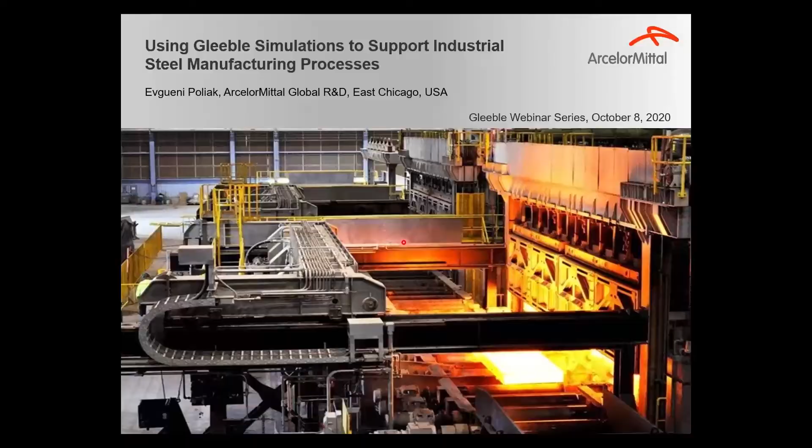So our objective here - our R&D Center supports basically this type of activities. We develop new products, we develop new steel manufacturing processes, we improve and tune existing processes because the world doesn't stay the same all the time, so we need to tune the process for the new product.

We transfer products between various ArcelorMittal facilities within the United States and all over the world. Of course, because it's manufacturing, there are always some manufacturability issues that arise, and part of our responsibility is to help the mills resolve these things. And also we are involved in application of our steel products at customer sites.

Because of that variety of our tasks, we have a very wide variety of equipment here. And our Gleeble lab is just a part of the research tools that we have here in the U.S. Research Center. The main objective for us is to provide very quick response to the requests from the production facilities.

That includes new product manufacture, new product development, because the faster you develop the product, the faster you commercialize it, the faster you get the payback.

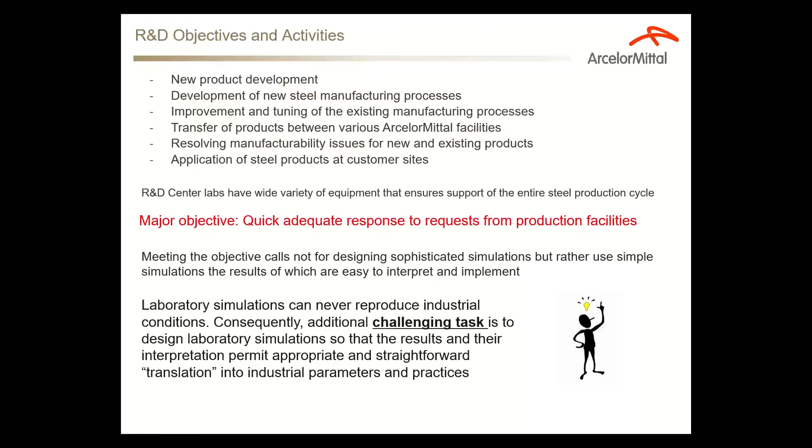Our Gleeble lab is part of our research tool park. We have a 3,500 machine with a torsion MCU, and quite recently we upgraded the control system to GTC, which gave us a lot of new capabilities.

What we use this machine for is deformation resistance analysis of flow curves, constitutive analysis, strain hardening behavior, you name it. We use these results to help mills set up their rolling practices.

That includes recrystallization studies and strain-induced transformations, high temperature torsion tests for plate applications, and hot ductility tests for casting applications. We also use pyrometry, pyrometer calibration, and simulations of surface oxidation extensively. We support some welding operations in the mill, since we also have welding simulators which are much more powerful, so we combine the Gleeble with those simulations, and we're also involved in the recent problem of liquid metal embrittlement.

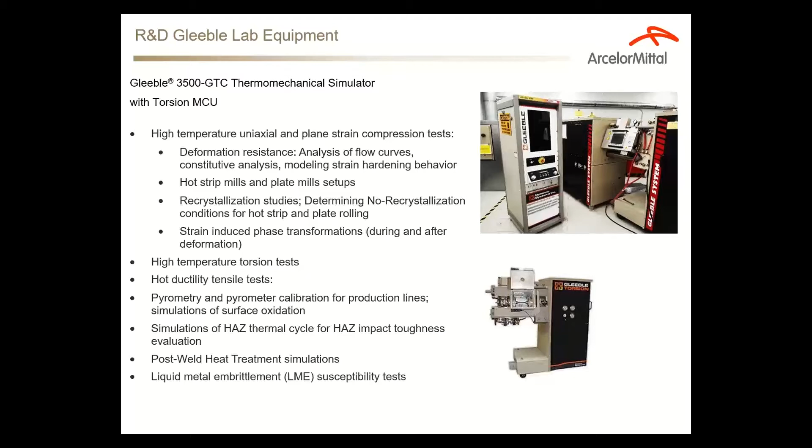Let's start with how we support casting simulation. When we cast slabs, they're not always perfect. The liquid steel is cooled, and through over-cooling, handling, and transporting the slabs, slabs can crack. Here you can see an illustration of how they can be cracked.

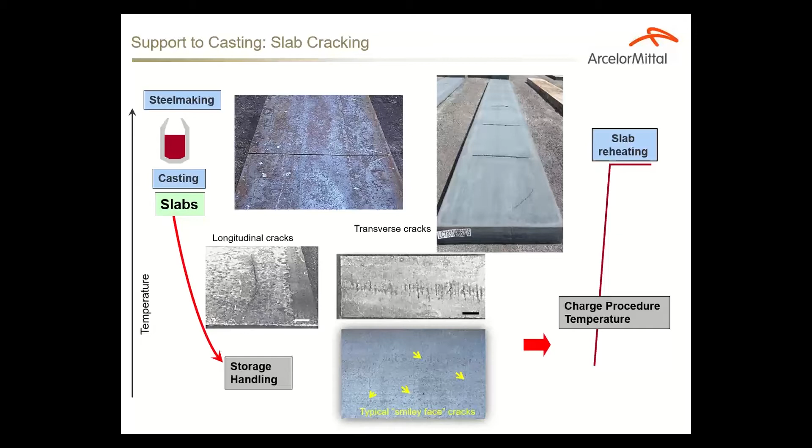Then these slabs are basically not usable for further processing. So one of our tasks is to find out why the slabs crack. To do this, we perform hot ductility measurements, which involve heating tensile specimens to a very high temperature, soaking, and pulling at different temperatures in tension.

This scheme shows how we machine the samples, and on top you can see the geometry of the sample. We use round cylindrical specimens with a depressed cross section in the center, because Gleeble mainly uses direct resistance heating, so we have to make sure the specimen fractures at the point where a thermocouple is welded.

Although this is not a very comprehensive tension test, we see it as an advantage, because when slabs crack, that means there are already some defects, stress concentrators present in the slab. So we're focusing on the localized deformation, which gives us an idea of why the slabs actually crack, not why the crack is initiated.

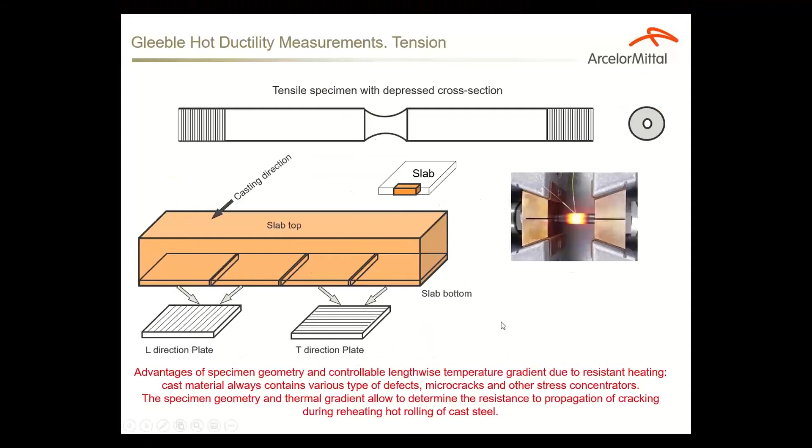Typically, all steels exhibit what we call a ductility trough in a certain temperature area. There are several types of ductility troughs when the slabs are cooled, and those regions of very low ductility of cast steels are related to different metallurgical phenomena, like precipitation and different kinds of non-metallic inclusions.

With our ductility measurements, we can detect some of these ductility troughs using the reduction of area criterion. We can also measure the stress at fracture and its temperature dependence. Interestingly, over the years we've tested about 200 compositions from various slab sources, and we've built a database that allows us to do this kind of regression.

So when a steel making plant asks us for ductility data, we can do both things: test the samples directly, and derive the ductility from regression equations built on our multiple prior tests.

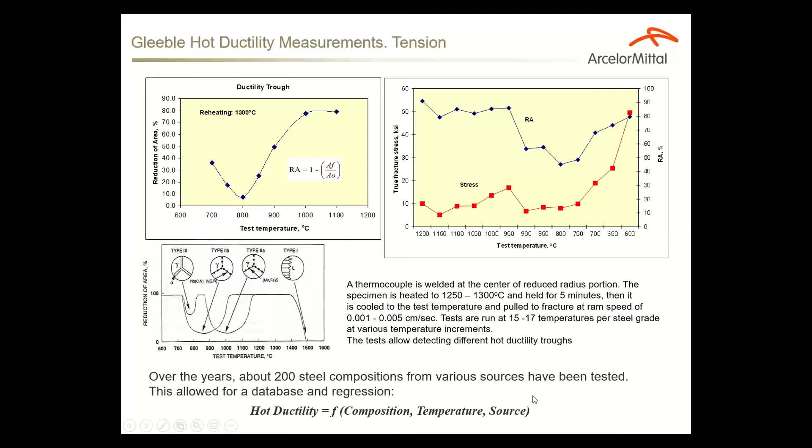Another aspect of our application to casting is that typically, if the caster is curved, the liquid steel goes down and is bent and unbent as it crystallizes. This kind of deformation can also induce fracture of the slabs, cracking, and other very unpleasant things.

So part of our task was to determine the safe curvature radius that a particular steel grade can sustain during crystallization. This is just an example for one of our steels. Of course, the susceptibility to fracture during crystallization depends on caster configuration, casting speed, and chemistry.

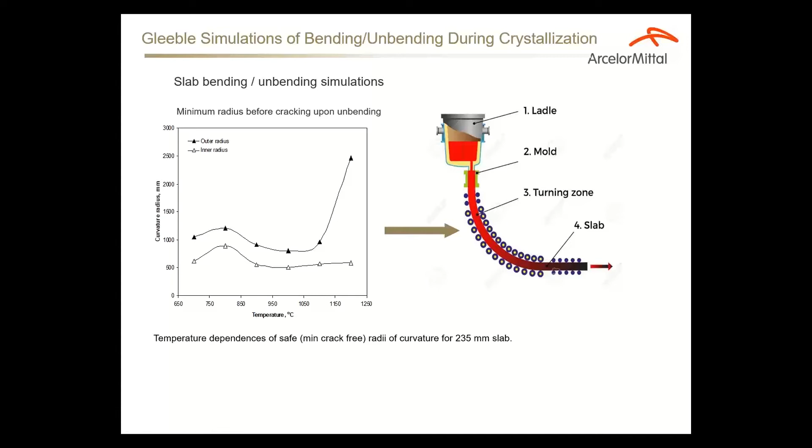So when we provide this kind of data to the mills for a given chemistry, it helps them adjust the casting speed and temperature distribution in the mold, and they find that very useful information because it can help prevent slab cracking.

The Gleeble machine, with its high flexibility and temperature control, allows us to simulate this kind of thermal cycling on the surface, and then we perform ductility tests. We show that this thermal fatigue, very low cycle thermal fatigue, can contribute to ductility loss.

There's one more application, again due to the flexibility of Gleeble machines in terms of temperature control and temperature variation. This is a very important result we just obtained recently, and our steel makers are very happy with this kind of simulation.

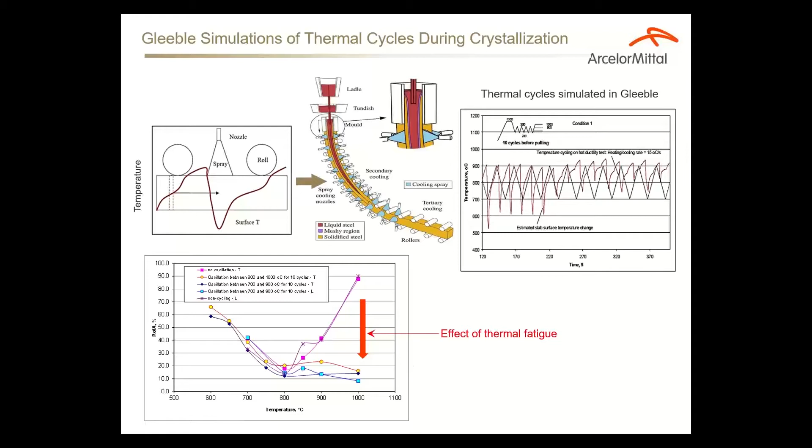However, our main application of the Gleeble machine is hot rolling, assisting the hot mills in their operation. Here we have to look at the philosophy of our simulations.

So when we have a steel, we have a material, and we have a tool to process this material. The tool does not depend on the material, so we have to adjust the hot mill, the tool operations, to process the given material to get the desired mechanical properties.

In other words, we have to find out what is the best way to process the given material through the given hot mill. If we want the same steel processed through another mill, that's a totally different story because all the mills are different. They differ in their capabilities, timing and pacing, cooling capabilities, and rolling capabilities.

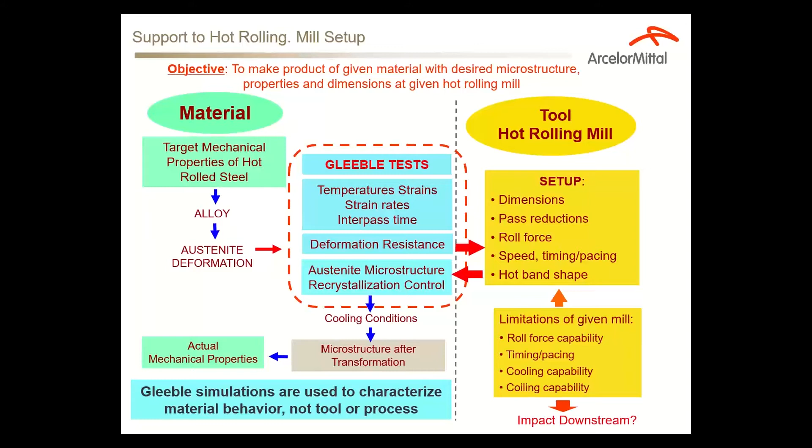So we run the Gleeble simulation to adjust different products to different hot strip mills - oh, not only hot strip. Our Gleeble simulations are used to characterize material behavior, not tools, and then we use this information to adapt to the given hot rolling mill.

A little short description of what's going on in rolling. The major parameter in rolling is the rolling force, which is contributed by three major factors. First of all, that's deformational resistance of the material. Then there's two parameters of the rolling mill: contact length and geometrical shape coefficients.

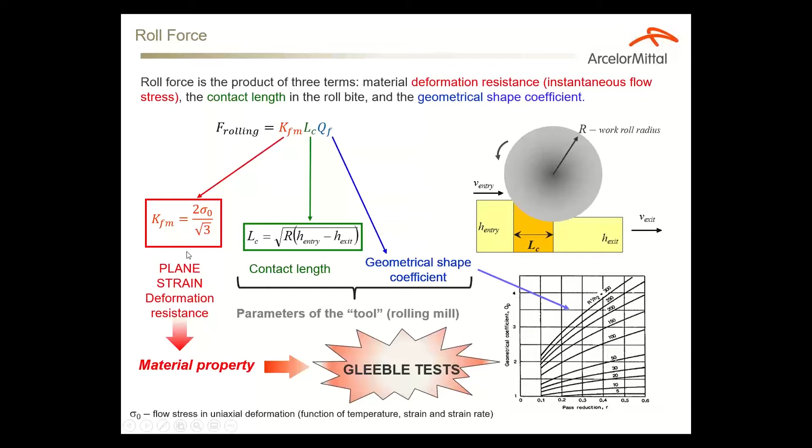So with Gleeble, we're addressing only the deformation resistance of material. We cannot do anything about the other two contributing factors. So Gleeble, as you well know, helps us to determine material properties during deformation - deformation resistance, this is it.

And what happens in rolling - usually deformation resistance is determined in terms of flow stresses, and is described using the so-called flow curve or stress-strain curve. However, in rolling, the work roll sees simultaneous deformation changing in the roll bite from zero to whatever the pass deformation is applied. So rolling models operate with what they call mean flow stress, and that is what Gleeble helps us to determine.

As the instantaneous flow stress, the mean flow stress is a function of strain rate and temperature. During hot deformation, the instantaneous stress basically attains a steady state value, which with increasing strains becomes strain independent.

We found that the mean flow stress at high strains converges with the instantaneous flow stress. That's a very convenient property of mean flow stress, so that we could use instantaneous stress values to approximate mean flow stress. We don't need numerical integration of the flow curves all the time.

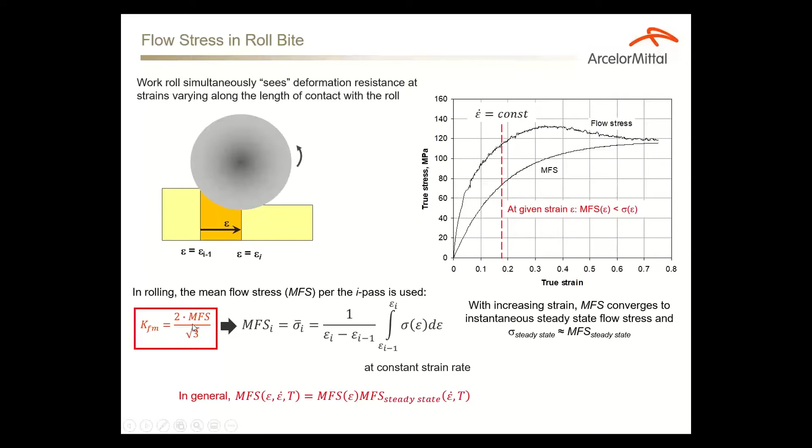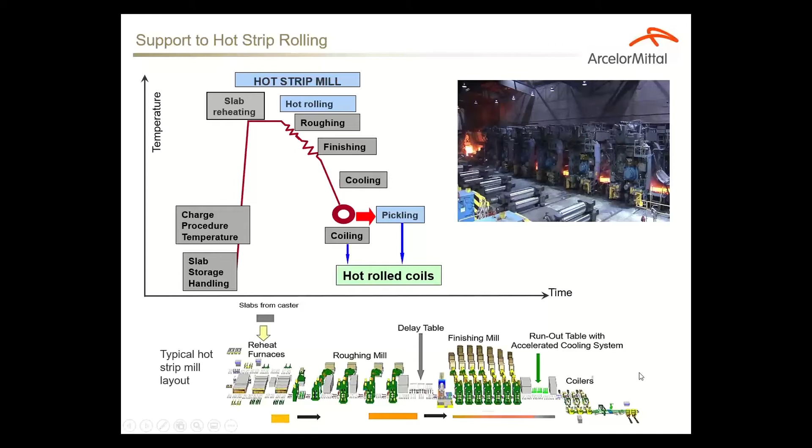Important parameters for the mill include setting up the rolling speed. Here, a very important feature is what we call the mass flow constant. The mass traveling through the mill is constant, so since the width is kept constant in this kind of rolling, the entry thickness to exit thickness ratio is exactly the ratio of the speed the strip exits the mill to the speed the strip enters the mill.

Now, I mentioned the delay table in front of the finishing mill, and that is why the temperature is not always constant. It typically decreases as the bar or strip is being rolled, because the tail of the strip sits on the delay table for a longer time than the head. So it loses temperature because this speed is much slower than the exit speed.

For this reason, to compensate for these temperature losses, the mills apply acceleration. So after they thread the strip through all stands, they start to accelerate the bar, speeding up the rolling, to somehow compensate for temperature losses of the tail entering the mill. But that's not always successful, and the temperature may decrease from the head towards the tail as it exits the mill.

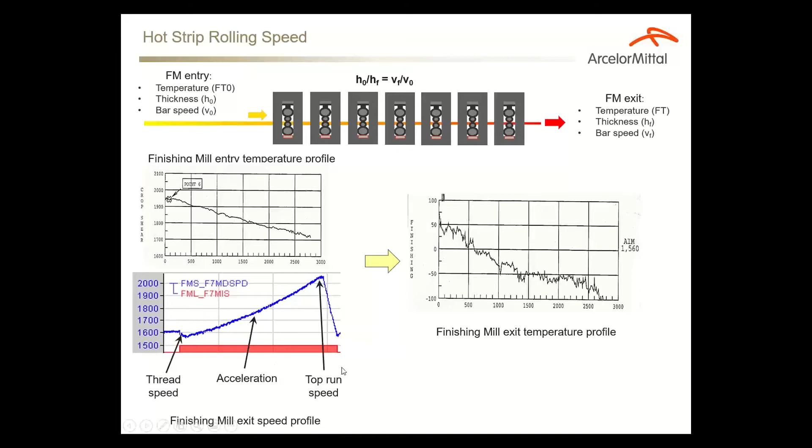Of course, when the speed of the bar going through the mill changes this way, it does change the strain rate at which the steel is deformed. Here are some examples of how the strain rate changes depending on the entry thickness and the final thickness of the strip. This example gives you an idea - it's basically an order of magnitude increase in strain rate.

You can see how the strain rate can change depending on the final thickness of the bar. Just giving you an idea of the orders of magnitude that the mill sees in terms of strain rate.

Important is that the Gleeble machine cannot reliably reproduce very high strain rates, just because the time of deformation is very short. So we need to accelerate and decelerate the ram in compression, for example. In torsion, it is easier to obtain this kind of strain rate, but the strain rate is not uniform if we're using the round bar sample.

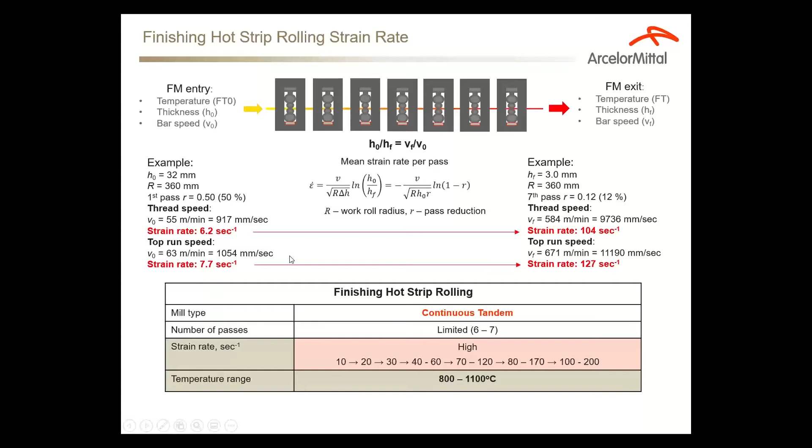So this is a challenge not only for Gleeble machines, but for other machines, to simulate more or less accurately the strain rates of about 100, and to make sure that the strain rate is uniform throughout the test. That is why we need some sort of translation algorithm to translate the results obtained at lower strain rates to what we can see in the mill.

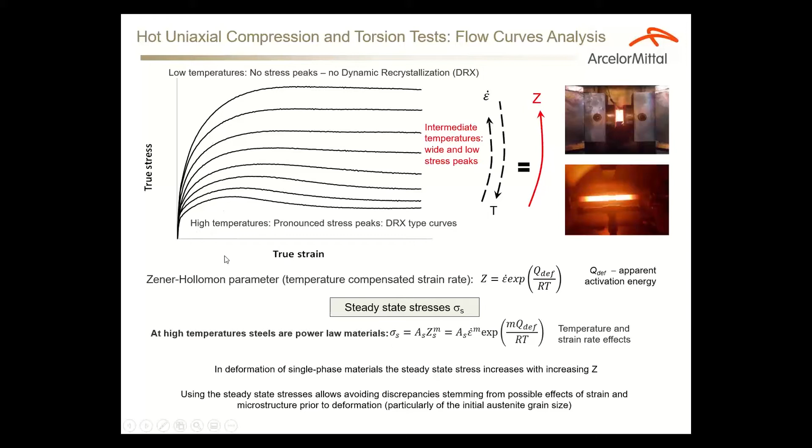Then we can go deeper. Once we establish the dependencies for steady state stresses, we can go deeper and analyze what's happening at small strains, or how the initial microstructure affects this.

We came up with a very simple determination of activation energy using just simple mathematics, the simple property of partial derivatives. Those partial derivatives are called strain rate sensitivity and temperature sensitivity. I call them engineering sensitivities because they're not exactly partial derivatives, they're just the differences.

What is important is how we do this - we select several stress levels and then follow the definition. We plot the strain rates against the inverse temperature for given stress levels, and the slope gives us this activation energy, which by this definition is just the ratio of temperature sensitivity to strain rate sensitivity of stress.

We don't bother putting any physical explanation on this activation energy. We think it doesn't have any meaning - it's just a parameter.

So we calculate it from our test data and then give this information to the mill. They use it very quickly.

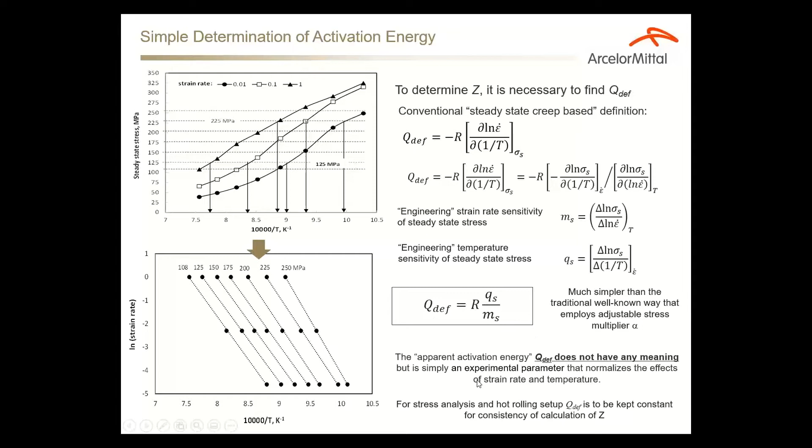Based on this, we developed what we call the four-point test procedure that allows us to predict flow stresses, and hence deformation resistance, mean flow stresses, in the mill.

The first step was to make sure that the Gleeble data and the numbers that we obtained during the test are translatable into mill language.

The mill wants not the stresses per each stand - they want the ratio of the deformation resistance in the last stand to the first stand. That is linear. This linear relationship allows them to set up the level 2 model and then adjust it for the rolling.

So we ran the trial test, low carbon aluminum killed steel, and we found out, well, we're pretty close.

This ratio that we obtained in Gleeble by extrapolation is pretty close with what the mill model calculates during rolling. So based on this, we were very confident that we could provide the information using this simple 4-point test. With the sensitivities, we can actually modify temperatures and strain rates and adjust the numbers for any entry-exit combination of temperatures and speed.

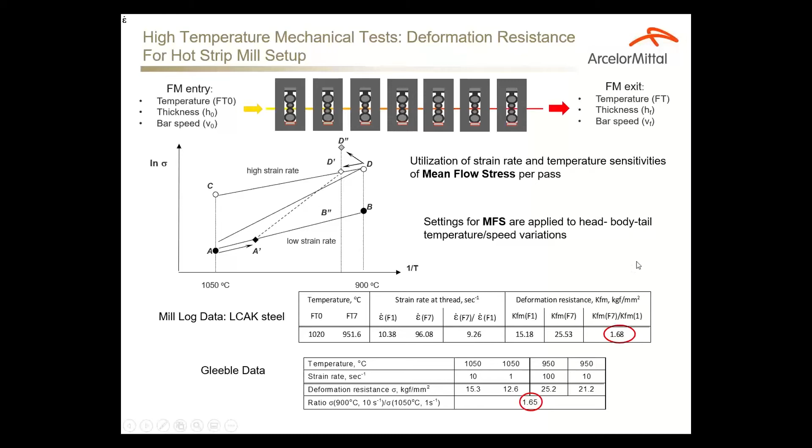This procedure is also being used to set up new grades, set up the strip rolling of new grades, again using the sensitivity parameter and obtaining the stress ratio. So it means we give the mill numerical, quantitative information of how harder or easier the new grade is to roll compared to the grades they are already producing.

Now, the mill operates in the following way. When a new grade comes in, the hot strip mill runs several, like 10 or 15, dummy slabs to teach the rolling model. The rolling model needs to be learned, and they roll 10 to 15 slabs to obtain the learning of the rolling model. Those dummy slabs and strips are then scrapped.

So this is a very costly stage of production. With our data, when we give them an idea of how easier or harder the new grade is compared to the existing grade, the number of dummy slabs can be reduced substantially, from 10 to 15 down to 2 to 3. Then the model is learned, and they run the production slabs. So this is a very important and efficient tool of cost saving when a new product is introduced to production.

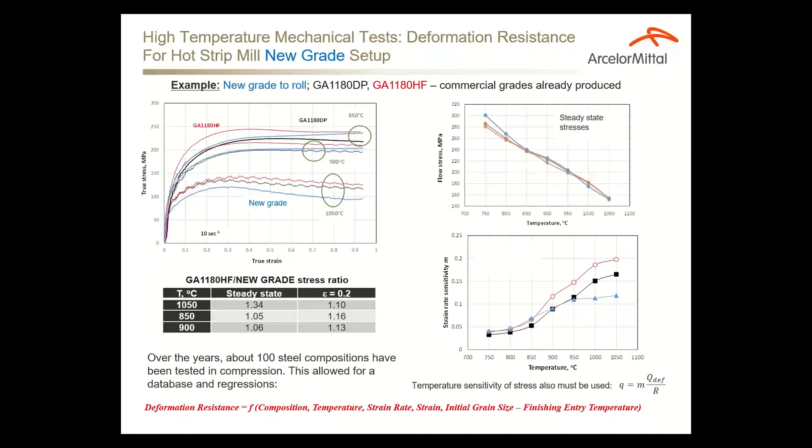The same simple procedure of compression allows us to define what are the limits in terms of dimension of the bars that the mill is rolling. The limitation of the mill is the roll force. So we can calculate how thin and how wide the strip could be rolled on this particular hot rolling mill with this particular limitation. So we can actually build a table of thickness and width capability for any kind of product that can be rolled on this mill.

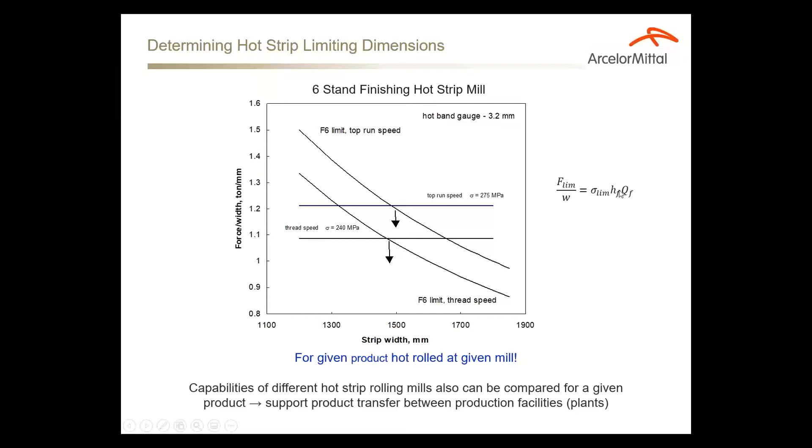And it's a very simple equation. We only need to determine in Gleeble test the deformation resistance. We take these parameters out of the tool. We know the limiting force. So the width is inversely proportional to the thickness, and that's how we calculate the limits and the dimensions of the steel product.

Another important application is recrystallization control. When we hot roll the material, the material is recrystallizing because of high temperatures. The goal of any hot rolling is to avoid partial recrystallization in the final product, because partial recrystallization cannot be reliably controlled.

Very slight variation, say in temperature of the bar, can change the volume fraction recrystallized, so we can obtain very non-uniform microstructure in between the passes, during the rolling pass, after exiting the mill. So the transformation of microstructure will also be affected.

And here is the diagram of the actual temperature distribution along the strip exiting the mill. You can see that the temperature variation is 60 degrees Celsius as the bar goes through the mill. So this is quite sufficient to induce very large variation in the fraction of partial recrystallization.

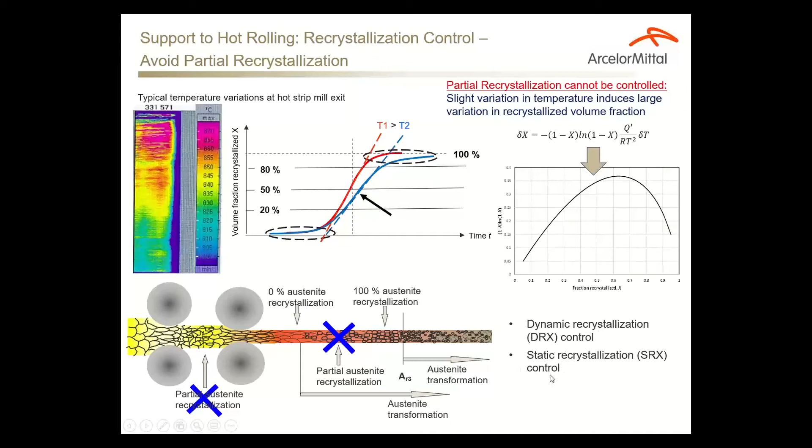So the goal is to avoid partial recrystallization by any means, and that applies to dynamic recrystallization and to static recrystallization. Dynamic recrystallization control can be done if we consider that steels are power law materials.

When we plot steady state stress against the Zener-Hollomon parameter, we found different microstructures depending on Z, and we introduced two, or basically four, limiting parameters, either temperature or strain rate, that present the boundary between full and partial dynamic recrystallization, and the same as a boundary between partial and zero dynamic recrystallization. Or we can introduce the respective Z parameters.

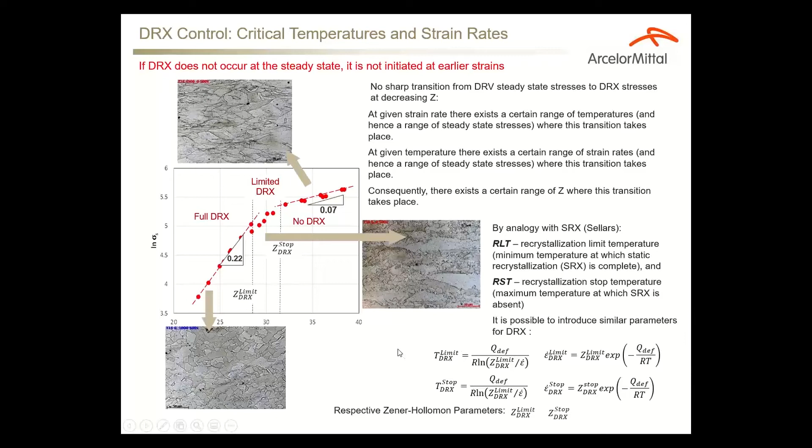So the convenience is that we know the strain rate or rolling speed and temperature, and we could use either of them to set up the no-recrystallization or full-recrystallization rolling schedule.

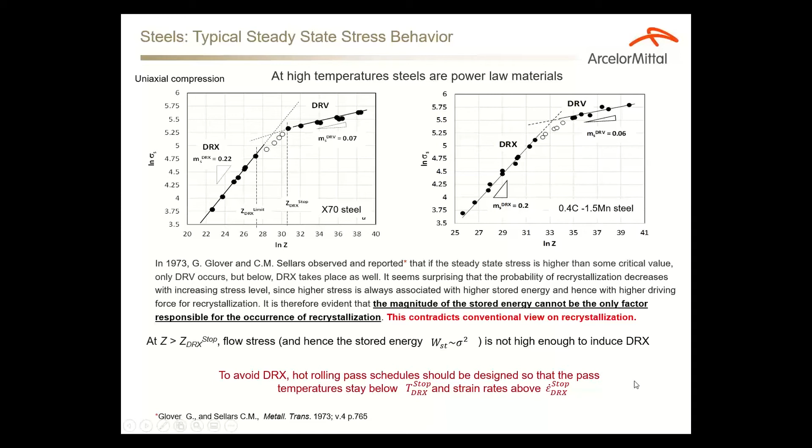Based on our experience, I can tell you that the majority of steels we're dealing with exhibit this kind of behavior. It's something very confusing, but this type of behavior was actually reported a long time ago, 50 years ago.

Interestingly enough, the strain rate sensitivity of stress, or temperature sensitivity of stress, changes non-monotonously. For the dynamic recrystallization range, it does not depend on temperature or strain rate, and is pretty much constant. Same when dynamic recrystallization is absent.

So when we determine the strain rate sensitivity from our Gleeble test, we can easily translate it into mill data, saying, look, guys, you have to enter this value or this value into your model, and then you will be okay in terms of avoiding recrystallization or facilitating it.

For curiosity purposes, we can calculate the volume fraction of partial recrystallization using the conventional lever rule, or mixture rule, for sensitivity.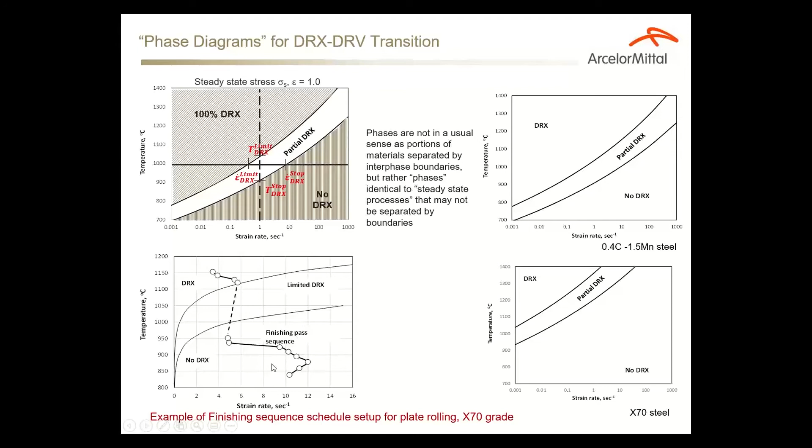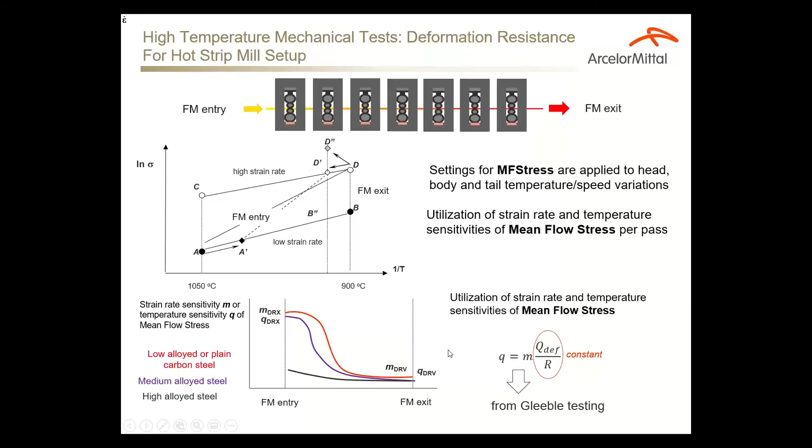It actually helped us to improve properties of line pipe X70 grade substantially. This is again this 4-point very simple method. Like I said, we have to supply the mills with the sensitivity data. We do that for different kinds of grades, and they're very, very happy with this data in terms of setting up their... another recrystallization control

is related to static recrystallization, and this is much more challenging because, first of all, static recrystallization does not produce immediate mechanical response, so we cannot directly use mechanical tests to assess it. And there's one additional parameter, time after deformation, that affects all the kinetics and the onset of static recrystallization.

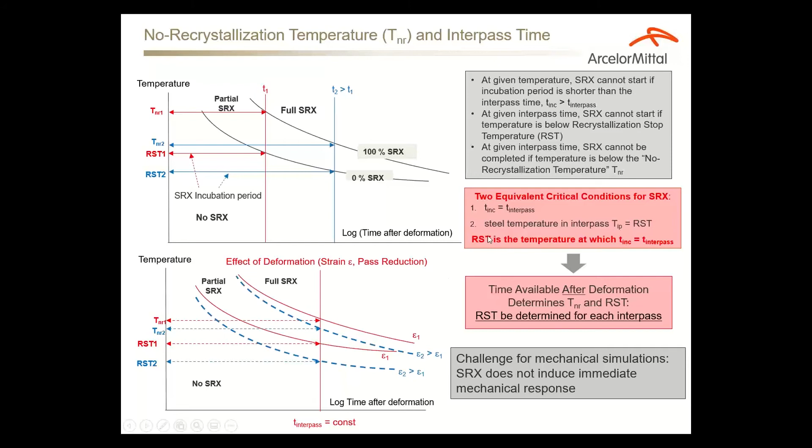So we derived two equivalent critical conditions for static recrystallization in the interpasses. One is when the incubation period for recrystallization is exactly equal to the interpass time, whether it's hot strip rolling or plate rolling, and when the recrystallization stop temperature is equal to the temperature of the bar in the interpasses. This is a very simple definition, but we are building - we have not finished it yet - a sort of model that allows us to predict whether or not static recrystallization occurs during rolling.

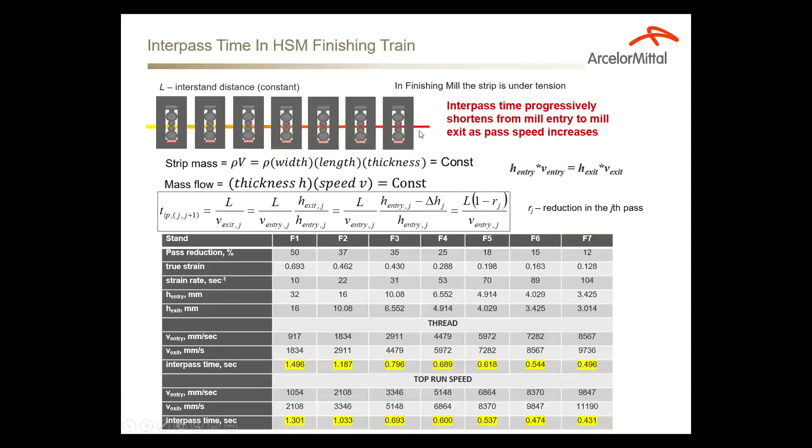As I mentioned, I'm running out of time already. This slide gives you an idea of what kind of interpass times we see during hot strip rolling, and they are pretty short, but in the first passes, we still can see that it is possible, depending on the chemistry, that static recrystallization can take place. Important is that the interpass time is shortened as the bar goes through the finishing mill in the hot strip rolling process.

Combining these two kinds of recrystallization control methods, we can actually tell the mill whether or not recrystallization is taking place. We determine the recrystallization stop temperatures for several grades. They are listed here, and unfortunately for us, these temperatures are below the finishing mill entry temperatures. So that tells us that many advanced high-strength steels do undergo dynamic recrystallization in the first passes of the hot strip mill.

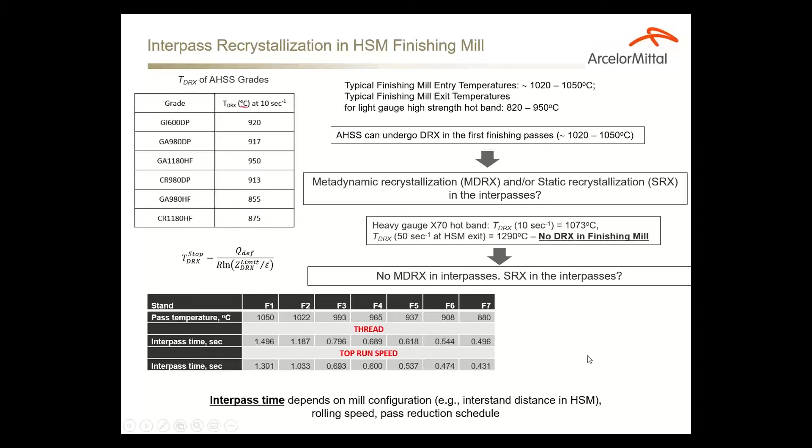Static recrystallization is also possible, as I mentioned before, because the interpass times are long enough for this recrystallization to happen. Like I mentioned before, we are developing the model. Typically, what people do is use double or multi-hit testing with different interpass times, or stress relaxation methods, to determine whether or not static recrystallization occurs between deformation operations. We're developing the model based on similarities between dynamic and static recrystallization.

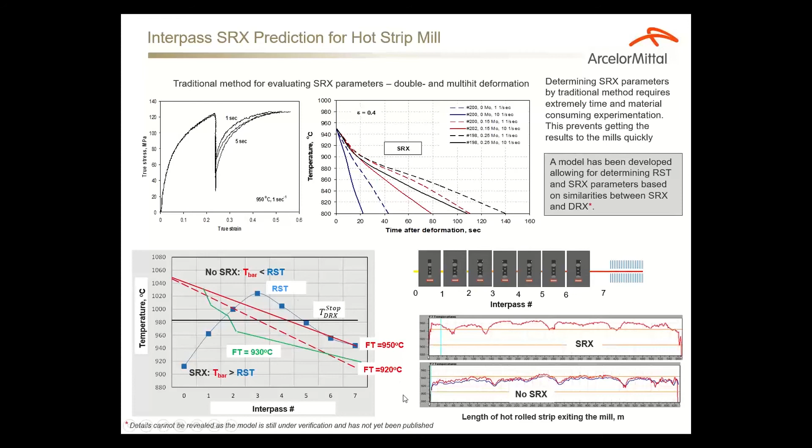This model allows us to estimate whether the recrystallization stop temperature is below or above the temperature of the bar. We provide the mill with results that guide them on how to control recrystallization, by changing the finishing temperature or applying interstand cooling so that recrystallization will be avoided. These are two actual temperature profiles at the exit of the hot strip mill, and you can see that lowering the finishing temperature can help avoid recrystallization before transformation starts. So this is information we're still working on, but we're giving the mills at least an estimate for no-recrystallization thermomechanical processing.

For plate rolling, we also use torsion tests to simulate the plate rolling process. The plate rolling feature is that it is reversible, so the bar goes in the forward direction and then in a reverse backward direction during rolling in one stand. The strain rates are low, temperatures are much wider, but one of the problems is that the plates are thicker than hot rolled strips.

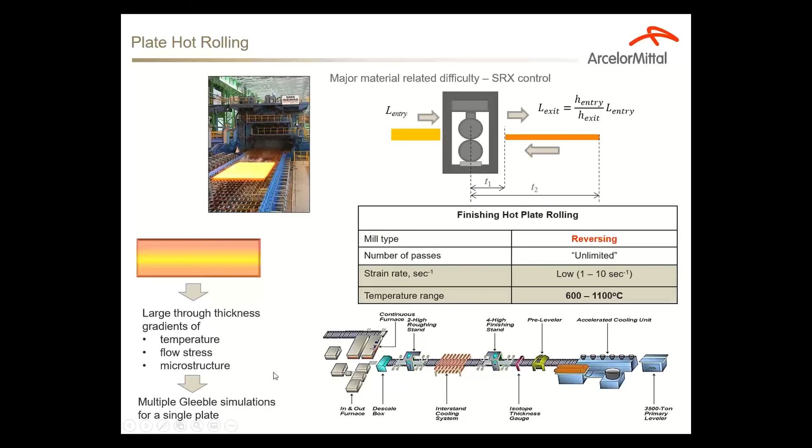So we have substantial through-thickness gradients of temperature, stress, and microstructure, and we need multiple Gleeble simulations to set up the rolling of a single plate. We are working on ways to reduce the number of simulations needed for plate rolling.

The same applies to interpass recrystallization, because in plate rolling and reversible rolling, interpass time increases from pass to pass, because the length of the strip or plate increases as it's being rolled. We're talking of much longer interpass times compared to those in hot strip rolling.

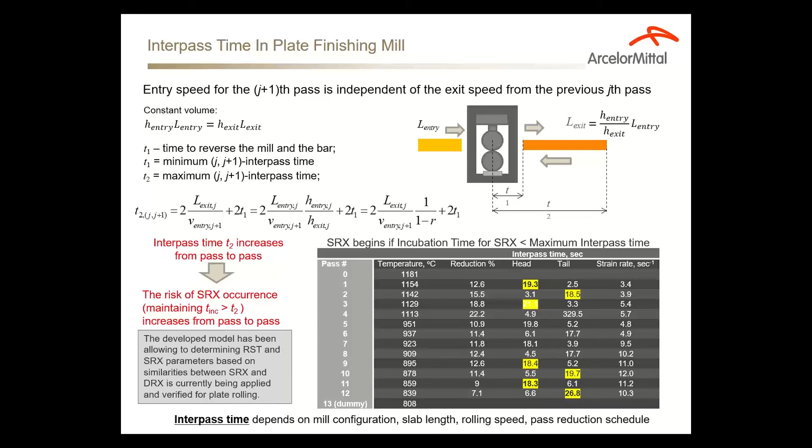So for plate rolling, static recrystallization control becomes very important. Again, we are trying to use our model, though it's still under development. We have positive, promising results from the plate mills as to preventing static recrystallization between the passes. Unfortunately, the only criterion here is measuring the final properties of the plate and looking at microstructure after transformation.

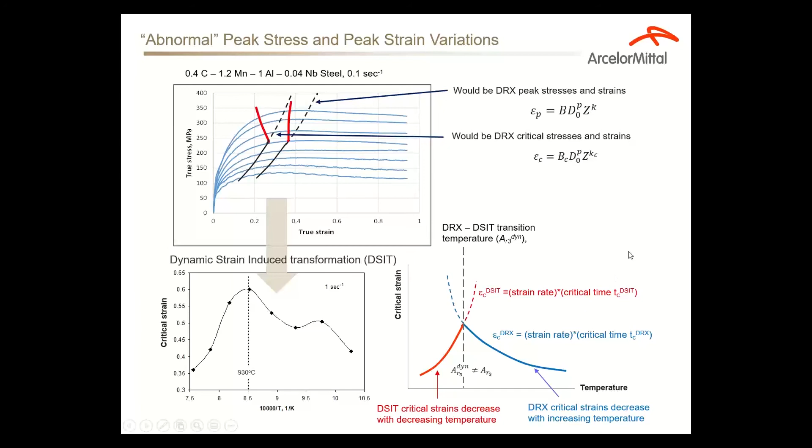We actually took the graph of the peak strain, rotated it by 90 degrees, and obtained curves which resemble the TTT curves of conventional phase transformation. So using this kind of graph, we can separate dynamic recrystallization from the phase transformation.

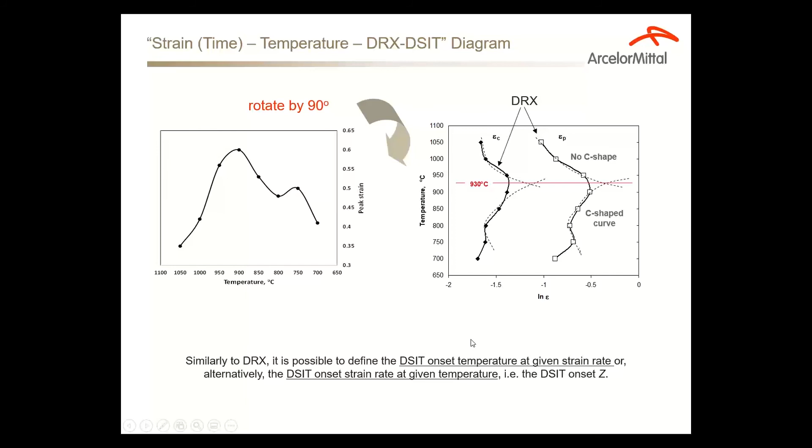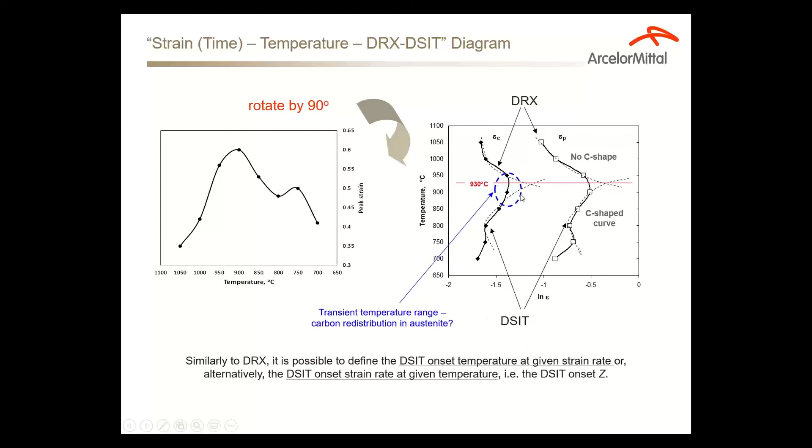We can determine the temperature at which the transition is happening, and the controlling mechanisms. Similar to dynamic recrystallization, we can derive the transformation onset temperature at a given strain rate, or the transformation onset strain rate at a given temperature. So we can provide the mill with information on when the transformation is going to happen during rolling, what the transition range is, and what temperatures they should be careful about, and so forth.

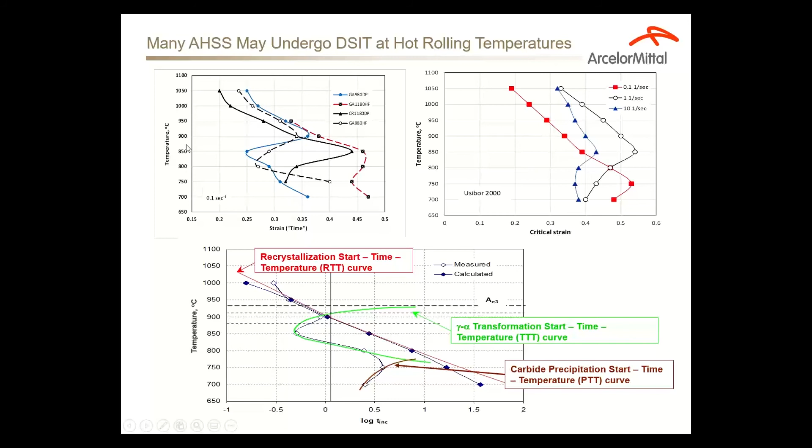This slide just illustrates how the strain rate affects the transformation, or how different grades can be transformed during deformation. Why is this important?

The transformation of austenite to ferrite changes the volume of the steel, and so it changes the mass flow. So when the steel is transforming in the mill, the mass flow is no longer constant. If the mill knows this, it can be taken care of. But if the mill does not know this, and the temperatures are not properly set up, the strip will cobble between the stands because the mass flow is not constant.

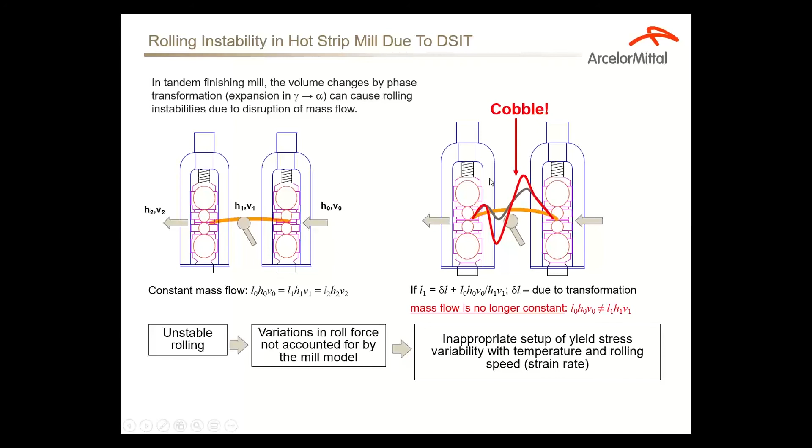So this is very important information that we supply to the mill to make sure that the rolling is stable, to set up the tension, interstand tension for the hot strip mill, and avoid cobbles, because cobbles are very costly to fix.

We also use our Gleeble machine to assist the mills in setting up the tension on the runout table between the last stand and the coiler. There are two types of tension here. We run tensile and compression simulations to determine the yield strengths in plane strain, tension, or compression. For tension, the information is fed into the coiler control system. For compression, it's necessary to know how to bend the strip around the mandrel and not break it.

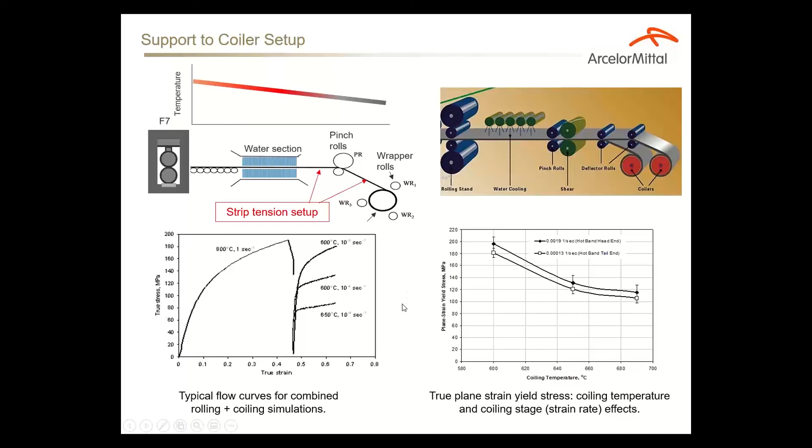One more application which we are very fond of is using pyrometers. Pyrometers are used all over the place, but mostly our concern is with the annealing and coating line. We measure the temperature of the samples in the Gleeble by thermocouple and by pyrometer, and when those temperatures don't match each other, that allows us to calibrate the pyrometer and measure the emissivity of the strip.

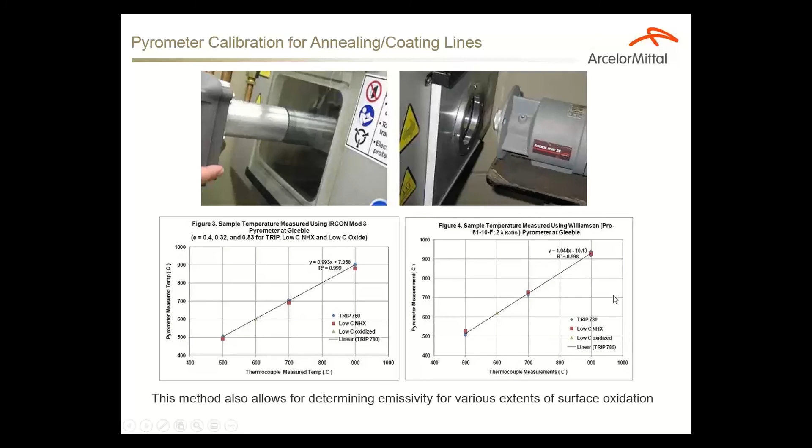Specifically, in the chamber we can achieve different kinds of atmospheres and different extents of surface oxidation. We can closely simulate how the strip oxidizes in the annealing and coating line, how its emissivity changes during heating and cooling, and what the pyrometers see in the mill, how they measure temperature, and how it compares to the actual temperature of the strip. This data is fed directly into the annealing and coating line control system.

We aim the pyrometer on one side, weld the thermocouple on the other side of the strip, calculate the delta temperature, calculate emissivity, and calibrate the pyrometer. This is, of course, not a certifiable calibration, but the mills bring their pyrometers here to check whether they're good or not, whether they need to be replaced or not, and so forth.

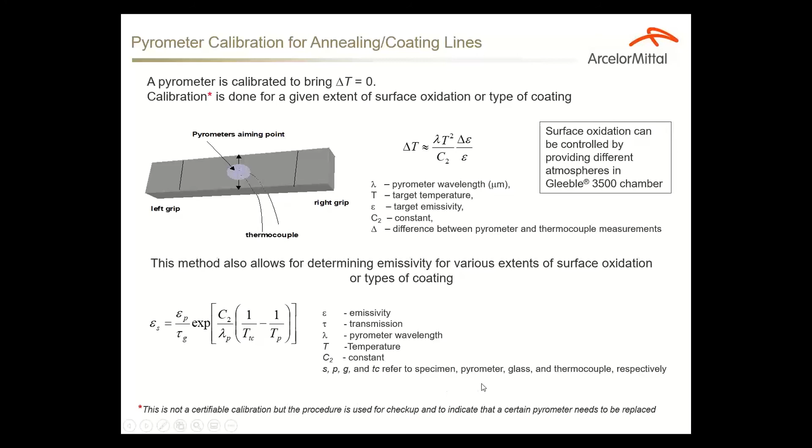In plate manufacturing, one of the most important tests is the ductility and toughness of the weld joints. So our Gleeble machine, of course, has the capability to simulate different welding cycles, and that's what we're using.

We came up with this simple idea to use a full-size Charpy sample, heat treated for a given thermal cycle of welding, and then machine the notch and test it for Charpy toughness exactly at the point where the thermocouple is welded.

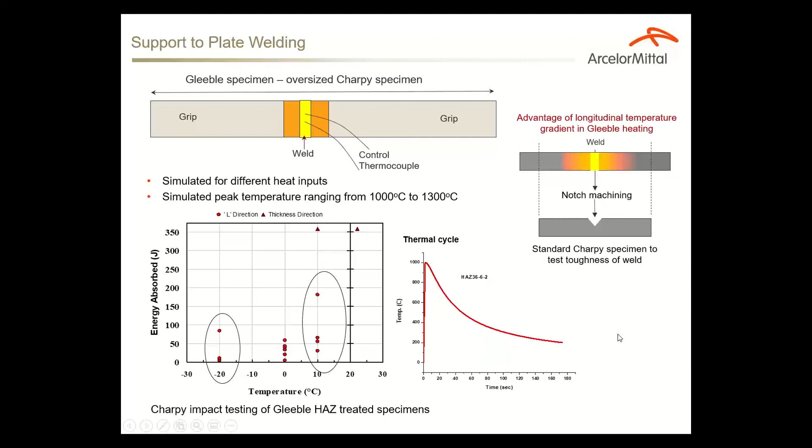I think this kind of test uses the advantage of the gradient heating of the sample in the Gleeble, because we're testing the toughness at exactly the weld point. We're not seeing any effect of the rest of the material on the weld toughness. That's a very important advantage of the resistance heating in Gleeble.

This type of heating is very advantageous because we can change the geometry, the width of the sample, the diameter of the sample, and control the temperature distribution along the sample. We can control the gradient, the cooling and heating rates, and that allows us to save time and material, especially for analyzing phenomena like recrystallization, cold rolled steels, phase transformation, surface oxidation, and tempering of martensite.

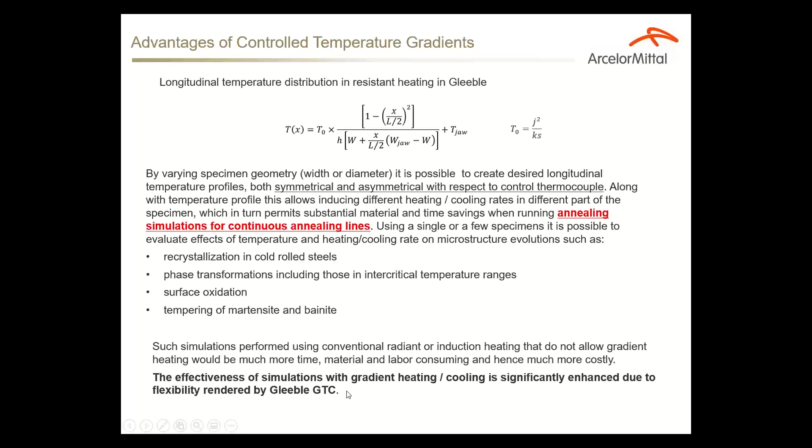I would like to emphasize that the effectiveness of such variable temperature simulation is much enhanced by the Gleeble GTC system. It gives us a lot of flexibility, and we're very happy that we upgraded to GTC recently.

This is an example of how we use that flexibility to study tempering of martensite. So we loaded a sample with variable widths into the Gleeble. We measured temperatures and hardness simultaneously at those locations, so you can see how the martensite was tempering and what kind of microstructure resulted.

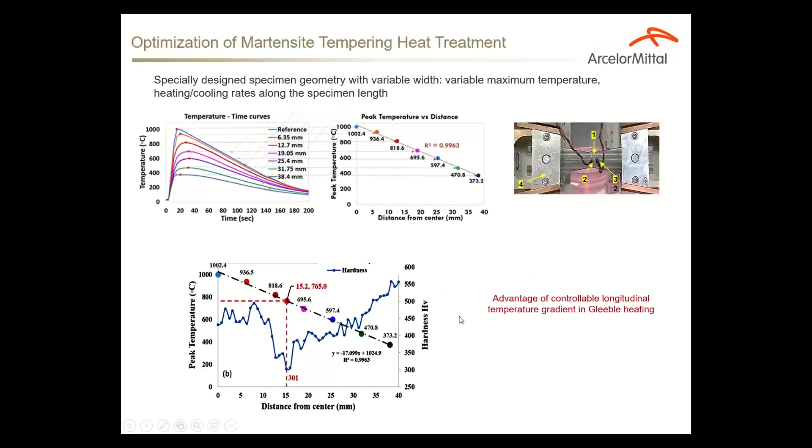Just using a couple of samples, not many. Machining costs money and time, testing costs money and time. This allows us to save a lot of time, money, and labor in performing our tests.

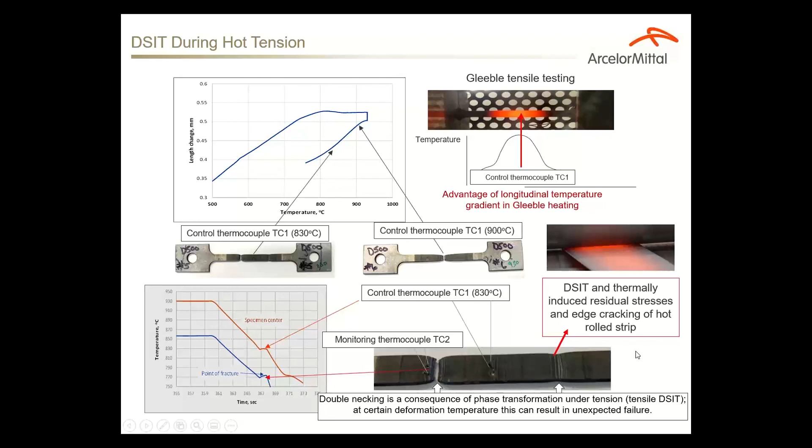Another application, again using the advantage of direct heating and thermal gradients, is studying dynamic strain-induced transformation during hot tension. This is a very interesting application we recently discovered, but it helps us predict whether dynamic transformation takes place in hot rolled strip, how it can affect edge cracking of hot roll strip, or how it can induce residual stresses that contribute to defects in the sheet material after hot rolling.

So the conclusion is very simple: Gleeble machines are very versatile and capable of rendering excellent possibilities for designing numerous kinds of simulations. Over the years, our Gleeble machine has proven to be an essential tool supporting multiple steel manufacturing facilities, and the results were very much appreciated by our ArcelorMittal facilities. It continues to raise our reputation as a research organization. I see Gleeble as a political tool to establish good relationships with research and production facilities.